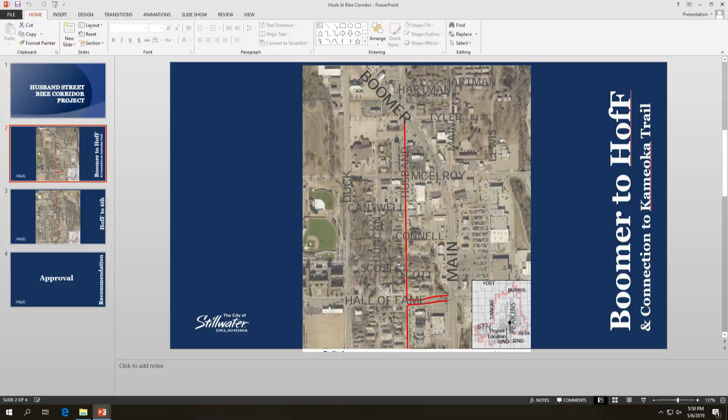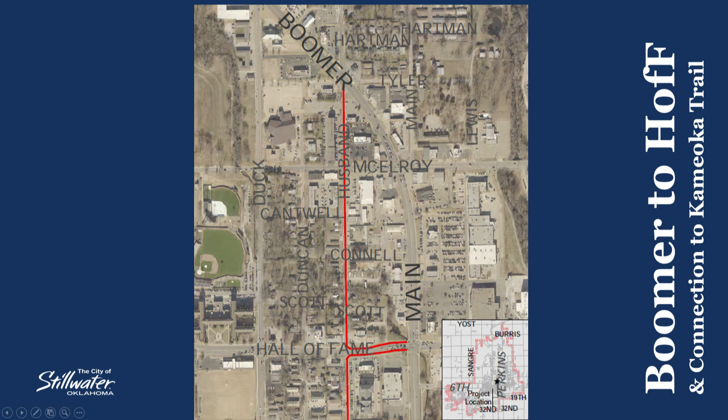When it comes up on the screen, the picture you will see is the northern part of the project, Boomer Road, and the red line is Husband Street. This piece comes down to Hall of Fame to connect to the Kameoka Trail. It will have the connection to Strickland Park, as Keith mentioned, and will continue south. The southern picture picks up at Hall of Fame and takes Husband down to 6th Avenue.

So this is quite an extensive project. We will be looking for members to serve on the steering committee, which is going to be the core group that works with staff and the designers. There will be members of BPAC, the Bike Pedestrian Advisory Committee, a member or two from the Chamber's Infrastructure Committee that has actively been involved in infrastructure throughout this community for a number of years, and we'll be looking for other volunteers who want to help the city get this project going and moving.

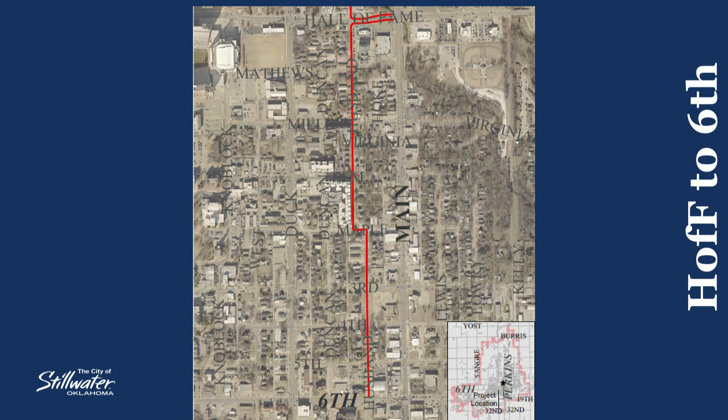Yes, this is the beginning of our public input, public initiative, and citizen engagement. Just to clarify, the project is described as really emphasizing bicycle and pedestrian traffic on that entire stretch of Husband. It will still be open to automobile traffic in certain areas, but you won't be able to drive from the high school to 6th Street on Husband without having to turn off or turn around.

It's a major project and an entirely new sort of initiative for Stillwater, so we will absolutely need a ton of public input. I was happy to see that within the engineering contract, the engineers understand we're doing all that for months before we even get to a design. They've already gone through and identified some key intersections, stretches of Husband Street, and also the Husband Street Bridge that are going to be critical pieces within any design and input we get from the community.

I'd be happy to answer anything else. Sure, although I'm not Monty. I do have a question on the budget layout, the pages that have the green heading.

On the public involvement, there are a number of items that the City of Stillwater will be handling. I'm just curious, would they normally be covered by the engineering associates? This was one of the pieces that was part of the negotiation with the engineer after they were selected from the interview committee. Their proposal includes a lot of activities that our marketing and civic engagement staff are already doing and helping with throughout the community, and we were able to take on some of that financial burden so the public engagement part, which the city is already doing, would not have an additional cost from the engineer.

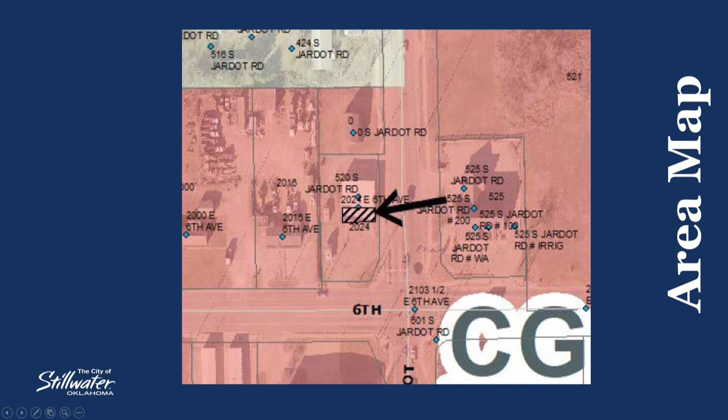The southern portion of this building is the property in question. And this is a street view, again showing the southern portion of the building that is being asked to be used for the medical marijuana dispensary.

They have met the requirements of the state. They have obtained their state dispensary license, and they can accommodate the parking on the property. Happy to answer any questions at this time.

Counselors, any questions? Does anybody know how many this is for us? Yeah, how many just made? What number are we on?

We have 17 applications. Some are tonight, and there are some scheduled for the June 3rd meeting, and that will accommodate all 17 dispensaries. And we have no power to say that's enough, or? No, sir. The state gives us very little leeway when it comes to approving these applications.

Yes, sir. All right, Counselors, at this time I will open the public hearing on this item.

I think we have, let me see. No, we have someone signed up for a different one of these. So there's no one to speak on this item, so I'll close the public hearing.

And I will ask you, Paula, for Planning Commission recommendation. Planning Commission recommends approval by a unanimous 4-0 vote.

Thank you. Counselors, comments, questions, or motions? Motion to approve the request for a special use permit at 520 South Jardot Road. Second. We have a motion and a second to approve item A. Please vote. With a vote of 3-2, the item is approved.

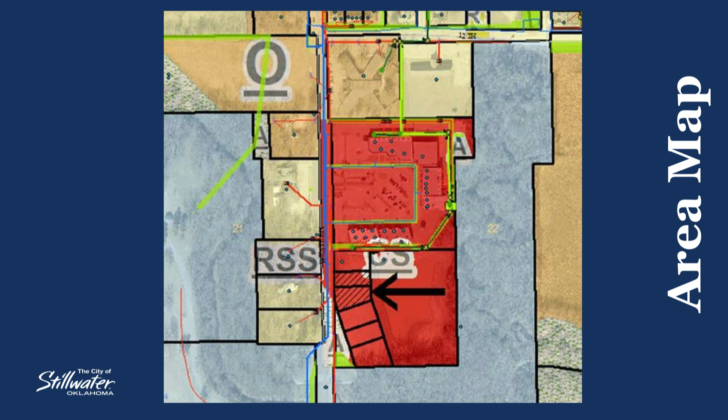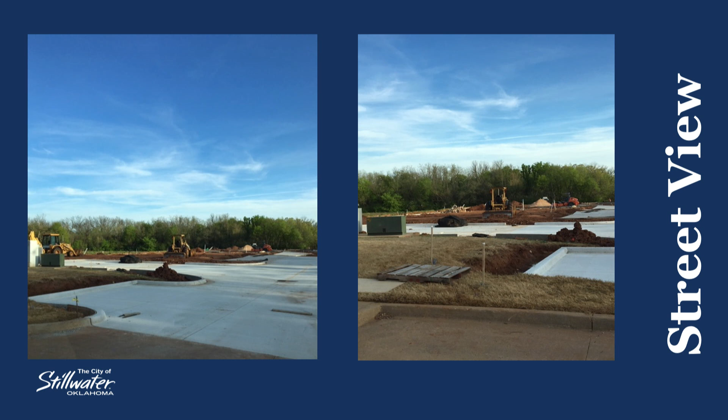This is a view of the property when it was just being platted, and this is some of the infrastructure work that has already been going on the property. So they are anxious to get started. Happy to answer any questions.

Counselors? I had a question about the parking. Are they just sharing the lot on the rest of Fountain Square, or is there additional parking being built in front of those offices?

There is additional parking. I can't recall if it is in the front or the back of the property, but there is ample parking within the existing Fountain Square development, as well as City Code allows for sharing when you have multiple uses on a single parcel, in essence a single development.

Okay, thank you. All right, at this point I will open the public hearing, and we have no one signed up to speak on this item, so I will close that public hearing and ask for Planning Commission recommendation. Planning Commission recommends this with a unanimous 3-0 vote.

Thank you, Paula. Counselors, questions, comments, or motions? Motion to approve the specific use permit at 1439 Southwestern Road. Second. We have a motion and a second to approve item B. Please vote.

With a vote of 5-0, the specific use permit is approved.

Takes us to item C, receive public comment regarding a request to close the south 5 feet of a 10-foot electrical easement located on the property addressed as 423 South Gray Street. This is CC-19-54. Mr. Dorman, did we have good notice on this item?

Yes, sir. Ms. Dennison, thank you again. This property is located on the east side of Gray Street. This is one that has come before you previously for the specific use permit for the multi-tenant in a single-family structure, the 2-story, large houses. They are coming in at this point asking to close, as indicated on the screen, the southern 5 feet of an existing 10 foot electric easement.

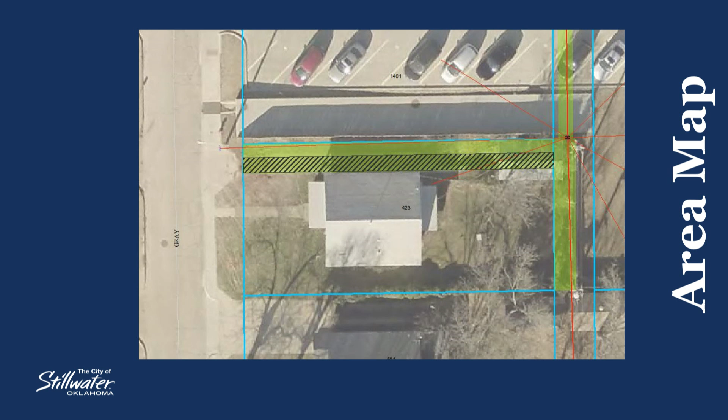The purpose for that is the street light you can see in the picture is within this 5 foot, and the electric utility only needs a 5 foot easement for the street lights. So that gives that additional 5 feet on the south side of the existing easement for them to utilize for development. Happy to answer any questions.

There are no issues from staff. Any questions, councilors? I will open this public hearing. We do have a speaker signed up, Mr. Gose.

Stephen Gose and Associates, 113 East 8th Avenue. Here on behalf of the applicant to answer any questions. Paula covered it, just trying to clean up an old easement that was too wide and can be skinnier.

So, questions? Any questions for Stephen? We like skinny. Yeah, me too, but too bad. Public hearing doesn't work for me. So, thank you. All right, thanks.

Paula, is there a recommendation on this item? Before I hear that, I'm going to close the public hearing officially and then ask you for the recommendation. Staff recommends approval of this request.

Councilors, questions, comments, or motions? Motion to accept the staff recommendation to close the south 5 feet of the 10-foot easement at 423 South Gray. Second. All right, we have a motion and a second to approve item C.

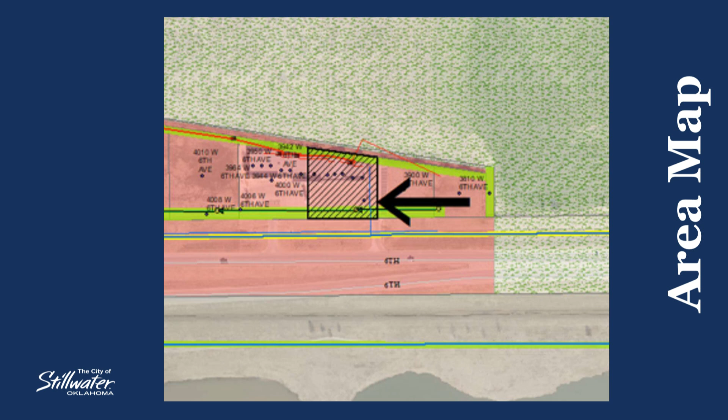Yes, sir. Thank you, Paula. Yes, thank you again. This property is located on the north side of Highway 51 or 6th Avenue West. This is in the development known as Kobe Plaza, just west of Western. You can see the hatched area is a portion of the existing building that has multiple bays in it. The proposal is about right in the middle of all of the bays that are existing out there in the current structure, and again, this is for a medical marijuana dispensary.

There is adequate parking. As you can see, there's signage already. They'll be looking at possibly a sign on the building as the other entities have, and they do have their state license. Happy to answer any questions.

Any questions, councilors? All right, I will open this public hearing. We don't have anyone signed up to speak on this topic, so I'll close it and ask for the Planning Commission's recommendation on this item.

Planning Commission does recommend unanimous approval, 4-0. Councilors? Motion to approve the specific use permit for 3930 West 6th Avenue.

Second. We have a motion and a second to approve item D. Please vote. With a vote of 3-2, the item is approved.

Takes us to item E, receive public comment regarding a specific use permit at property addressed as 1930 North Jardot Road to allow a medical marijuana commercial grower facility in the IL Light Industrial Zoning District. This is CC-19-56. Mr. Dorman, did we have good notice on this item?

Yes, sir. Ms. Dennison? Yes, thank you. This property is located on North Jardot. If we went further on up, we would be coming up on Lakeview, and this is on the west side. The property is going to be in this portion of the existing building. This has previously been used as warehousing, and they have a permit to remodel this facility and convert it to the grow operation.

Again, they have their state license and they meet the other parking and signage requirements. Happy to answer any questions.

Any questions, councilors? Not a question now, but I think it is important to recognize that the commercial growing facilities don't have a distance requirement from schools, although it does meet the 1,000 feet by a few feet. Yes, it does. As we understand and have found in our research of the state law and the rules that have been put into place, it's dispensaries that have the 1,000-foot separation from schools, whether they be public or private schools.

All right, I will, at this point, open the public hearing. We do have a speaker signed up, Mr. Ryan Brosnahan.

Hi, I'm Ryan Brosnahan, 920 South Murphy Street in Stillwater. I am the applicant and the founder of the company. I'm here to answer any questions you guys might have about the SUP.

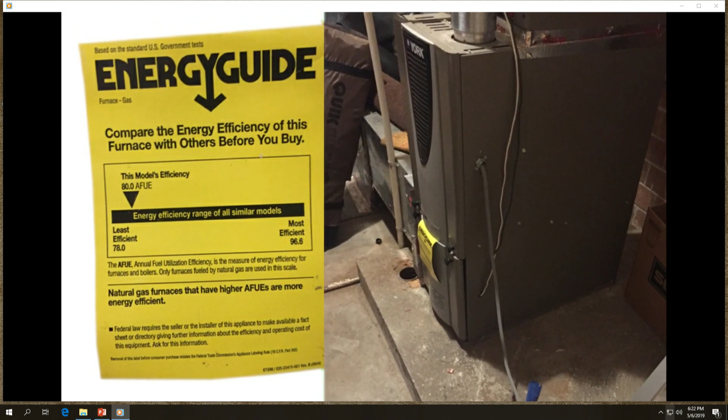Additionally, the HVAC system that currently supplies the south meeting room and south lobby entrance is insufficient for hot summer days. As well, the existing south lobby entrance only has one supply vent to accommodate for 2 double doors, and typically there's a dedicated vent per door. However, we believe these issues are resolvable.

This phase-based process has been laid out in order to make our solution both attainable and economically feasible. As an immediate solution, we address the ADA accessibility issue in the north parking lot. This provides additional ADA parking spots and accompanying curb cut to ensure easy and immediate access to the north lobby entry.

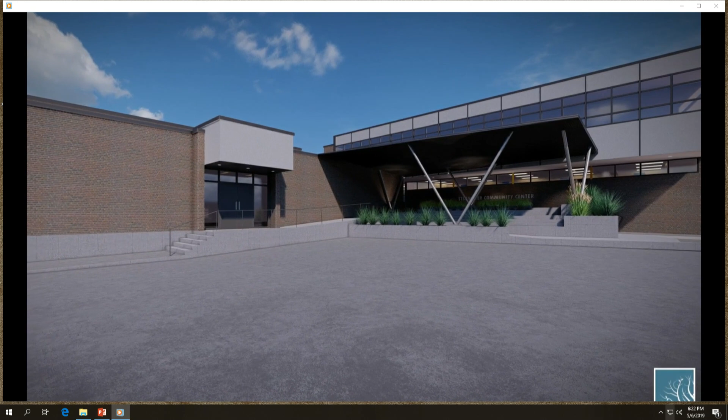Following phase 0, we propose a new ADA accessible route to the south lobby entrance directly from the parking lot and lunchroom hall. This new ramp is designed to invite and pull visitors to the south lobby entrance, where visitors can opt to utilize the adjacent stairs. An all-weather canopy above the ramp is provided for protection to visitors being dropped off or entering from the parking lot.

The next phase includes the addition of a vestibule and supply vent to the south lobby entrance to decrease the amount of square footage serviced by the HVAC system, which has been upsized to a 5-ton 16-SEER unit.

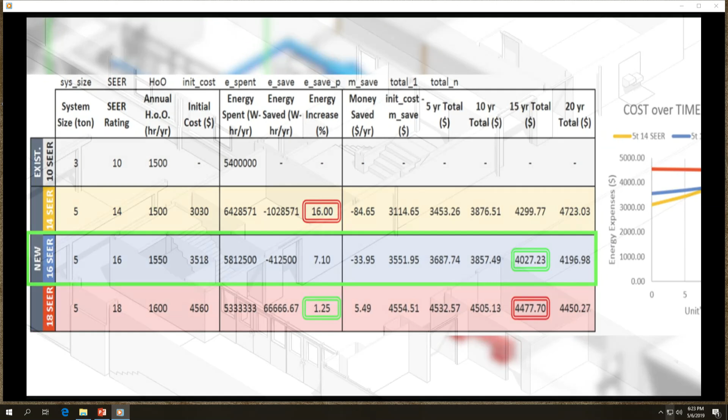The final phase includes the addition of an elevator in order to provide ADA access to the second floor. The elevator location we have selected also connects the currently separated east and west wings at the second floor landing.

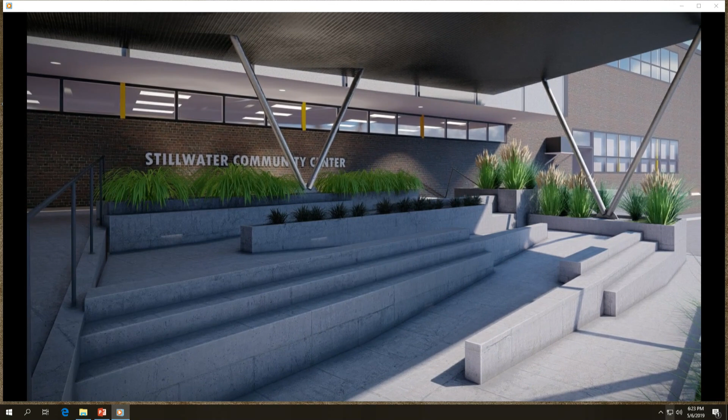The Stillwater Community Center is a vibrant cornerstone of the community, which will benefit greatly from these efforts. We hope the solutions that we presented will encourage and spark inspiration for providing the community center and its guests with these improvements.

Yeah, so... that's not ours.

Okay, sorry. I don't know if you guys want to hold this or play with this. It's just a 3D printed model of it, and we can just pass it around. This is removable. You know, the 3D printer prints in layers, so these are not steps.

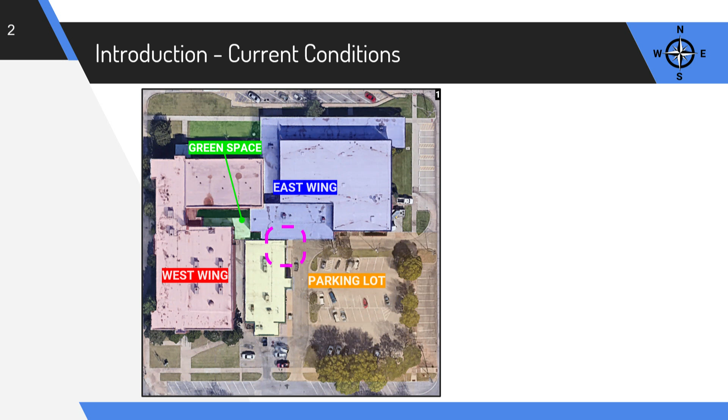So as the video said, there's a lot of great uses for the community center, and currently there is one ADA access entry into the community center, and it is on the far north side, about currently over 100 feet away from where the current ADA parking is available. We kind of saw that, and we thought that was a little bit of a problem.

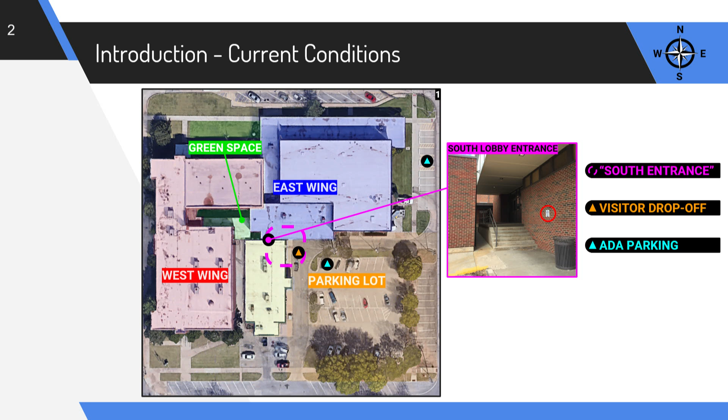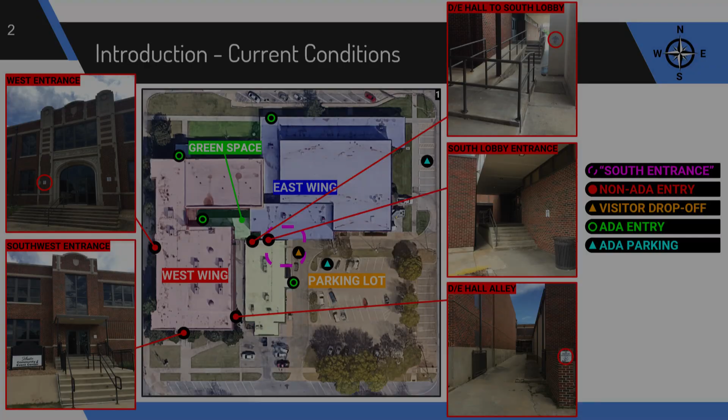Currently, the parking lot, which includes some of the ADA parking, is on the south side of the building, and then we have a little bit of ADA parking on the east side of the building. The visitor drop-off is on this south corner that meets here, and there's a bus drop-off there. But as you can see, there are 5 spots around the building that have these signs that say no ADA accessibility. We hope to fix that a little bit, at least.

Our project spans between the 3 existing buildings. Well, they're all one building, but they kind of act as 3. So it spans between the 3 different parts of the building, connecting them both for ADA accessibility and for those who need to move tables and chairs, making the whole management of the building a little bit easier.

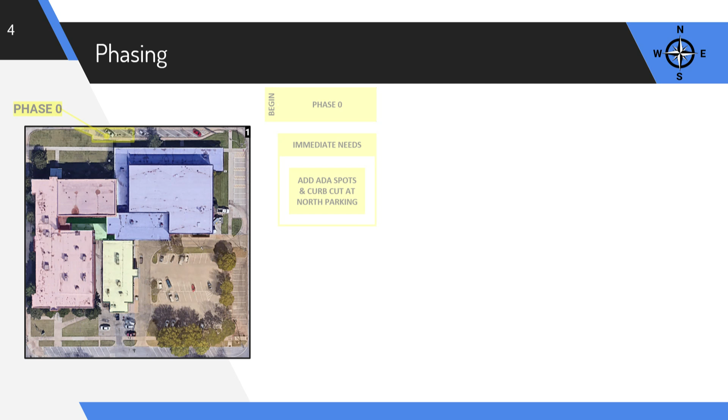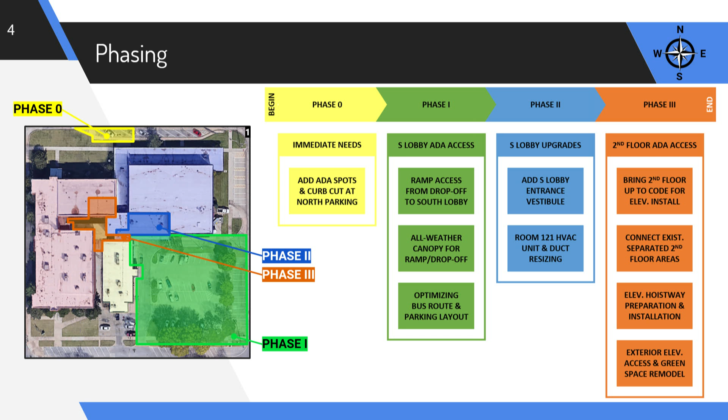So we've broken it down into 4 phases. Phase 0 being the smallest, probably what should be done first, unless you jump straight into phase 1, which is adding a little bit of ADA accessibility to the north side, which Ethan will talk about.

So phase 0 is to help bolster the immediate ADA parking. As you can see on the top picture, that is the north side of the building where you have about 5 or 6 ADA parking spots. For phase 0, we're proposing to add a small curb cut on the north side parking to help eliminate the very long distance that people are traveling for ADA access.

If we put something right there along the front side of the doors on the north side, it cuts the travel distance by about 125 feet.

This would just be a very small city project, something very small scale that could probably be done by a small crew, probably done by the city, whomever y'all see fit. We didn't necessarily do a full cost analysis due to the scale of this particular phase, but we estimated about $2,000 and maybe about 2 to 4 weeks, depending on the type of construction crew that is chosen and the methods that they decide to implement.

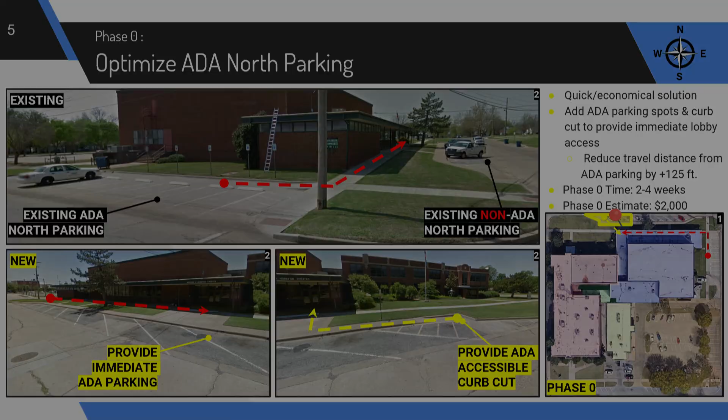So, a portion of phase 1 is reconfiguring the parking lot. On the left side, you can see the existing parking lot.

Where it says the drop-off, it's going in the wrong direction. Whenever people come off the bus on the right-hand side, they have to cross in front of traffic to get into the dining hall. That's a big issue, especially for those with ADA requirements, since it means crossing traffic that could include moving buses or vehicles, or someone not paying attention. So we're trying to build in that safety.

Additionally, the parking lot itself is very closed off. It's rather spacious as it is now, but it's not a very effective use of the space. So what we're proposing is to reverse the traffic flow, having the bus drop off right at the entrance of the ramp system. We're also going to reconfigure the traffic flow from the east side: you can either follow the dark green line with the bus route and come into the south row, and find a parking spot through there.

In talking with the contractor in the last few weeks of our project, he estimated very generously about 5 to 6 months of construction time. Using RS Means and vendor values, we came up with an estimated cost for this phase of about $324,000.

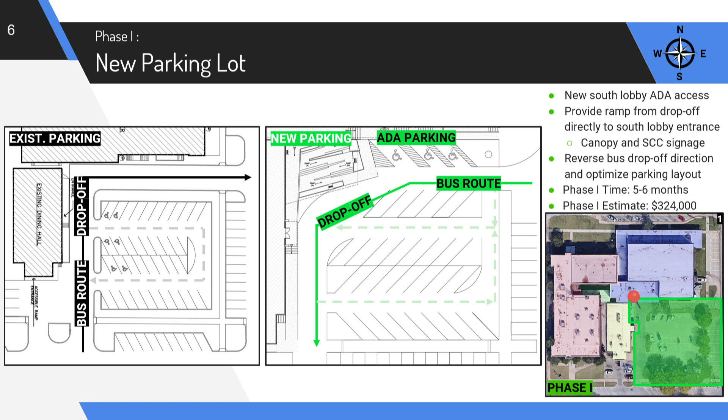Another major part of Phase 1 is providing that ramp access and the canopy covering. This will give a spot for the bus to drop people off while they're covered, and then they can make their way into the building accessibly, without needing to use some weird lift or go around the building to get inside.

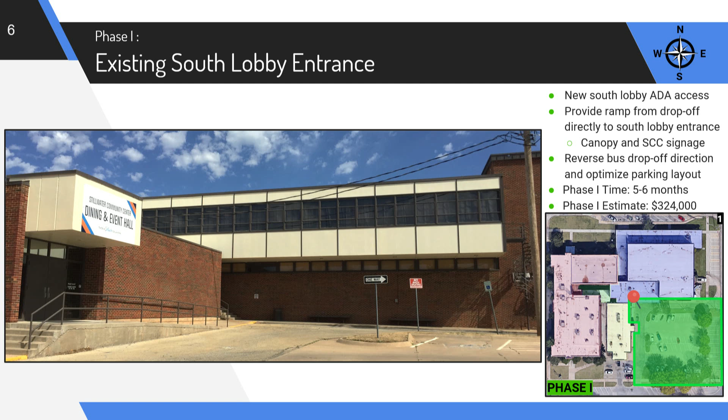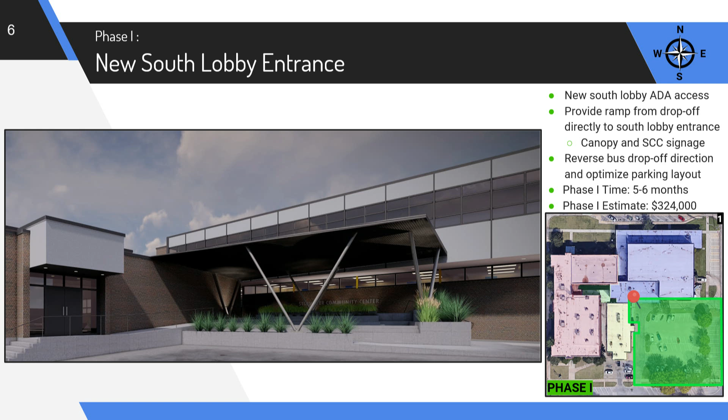So this is what it currently looks like, and this is what we are proposing. We propose this because it not only provides the ramp up, but the ramp becomes a focal point of the entire building. This would provide a seating area for those waiting to be picked up, or for anyone who wants to go outside and read with a bit of greenery around. It provides a nice, calming space at the front of the building.

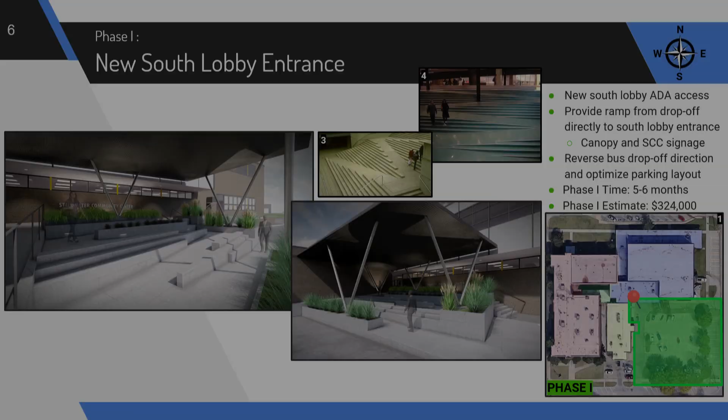Moving on to Phase 2: we are interested in upgrading the south lobby entrance.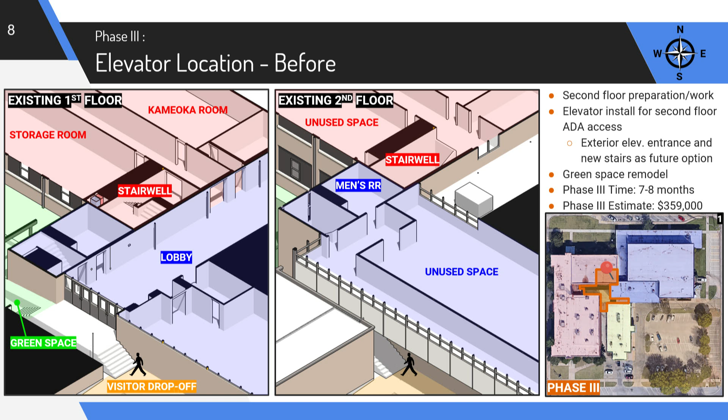With this single elevator, we can accomplish the job of two elevators. Instead of having one per space, we can combine these with this single elevator by that second floor elevator landing. This is about an 8-foot by 14-foot circulation space, and that provides the connection for fire evacuation egress. Phase 3 also looks into providing an exterior elevator entrance and new stairs as a future option.

This is because the second floor in its current state is unused, so we don't really have an idea. A possibility is that there could be some residential dwellings on that second floor, so we look to provide 24-hour access for potential residents, as well as stairs in case the elevator undergoes maintenance. It's just a convenience thing.

As you can see, the Phase 3 time estimate is about 7 to 8 months. That's pulled from the company Kone, or Cone Elevator—I'm not quite sure how you say it—but that's their time frame for elevator install. That does not include the amount of time required to bring the second floor up to operable conditions to build the hoistway, because the hoistway has to be built before the elevator company can install. It's a process, and we estimated that to be $359,000.

And the yellow just shows that connecting space on the second floor. This is our final slide, just to show again the summary of the phases.

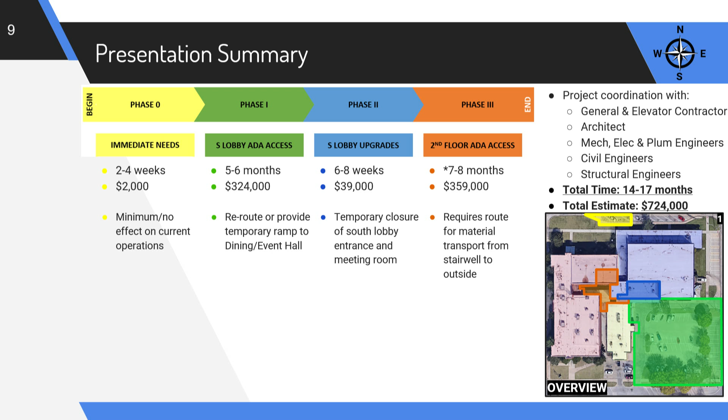But again, the Stillwater Community Center is a vibrant cornerstone of the community, and we believe that with these solutions and ideas we presented, we could provide, or hopefully spark and influence, some sort of inspiration in helping address these ADA concerns at the SCC.